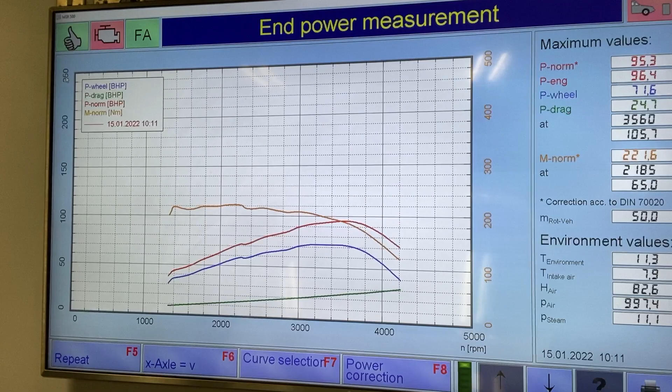So we'll have a look at the tuned graph now. I am very, very cold - I'm looking forward to getting home.

Bear with me, I'll overlay it over the standard graph as well.

These are a software down-tuned engine, so although it was 95 brake horsepower standard, we've made 156. Some people think that's too much, but these vehicles might make 165, 170, or they might make 150. It's irrelevant what numbers they make. What's important to me is that the engine is correctly tuned, whatever numbers it makes, and they all do differ.

So what I do at Pendle Performance is tune the engine, I tune the complete vehicle. If it's got huge, large wheels on, I'll tune the complete setup. I'm not tuning it for balls-out power, for bragging down the pub. The numbers are the numbers. I'm not interested if it makes 10 brake horse or 1,000 brake horse. As long as that engine's correctly, and more importantly, safely tuned, that is what I want to do.

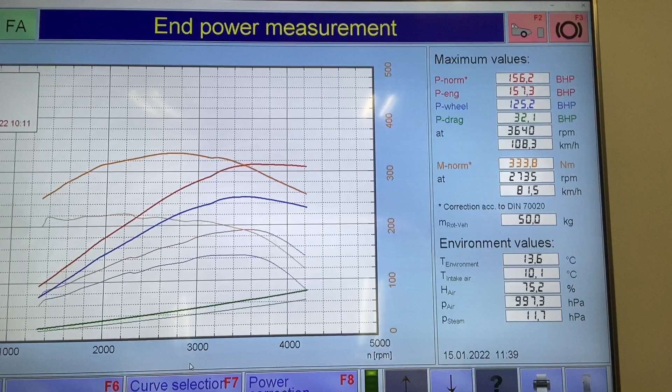So this is a look at the tuned result. We've made a very nice 156, and we've made a perfect 333 Newton meters of torque. Now these particular vehicles use a 5-speed gearbox, and we've talked about this many times. The fact is this 2 litre Euro 6 engine will make big torque at low RPM, way under 2,000 RPM.

A lot of tuning companies get mixed up. They tune the engine, yes, they tune it correctly, and they might make 360, 370 Newton meters of torque. The engine's perfectly fine at making that, they might make that at 2,000 RPM, but the drivetrain's not perfectly fine with that. It puts huge strain on the drivetrain.

So what you have to do with these is tune them for progressive torque delivery. There's an internal ECU torque limiter map, and the easiest way is to do it on that. You progressively tune that map, so you've got progressive torque delivery.

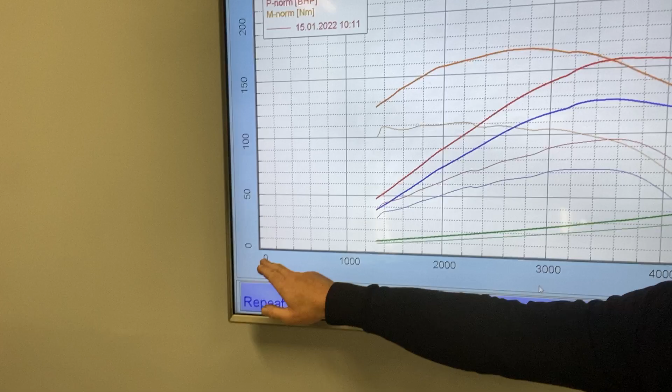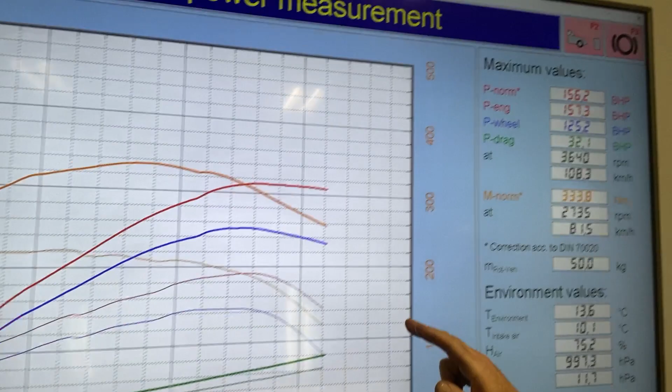And this is what you can see. So this is engine RPM, 0, 1,000, 2,000, 3,000, 4,000, 5,000, and then torque. You can see we've got progressive torque delivery, and we're actually making our peak torque, 333, at 2,700 RPM. This engine would safely make peak torque at 1,900 RPM.

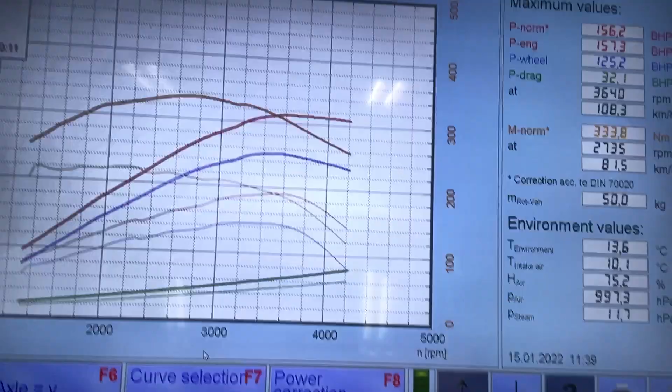It'd make 380 Newton meters of torque, but the drivetrain wouldn't make it. You'd end up damaging the drivetrain, the drive shafts, the gearbox, and everything else. So it's vitally important to make smooth, progressive torque delivery.

A lot of people ask why go to Pendle, or what makes Pendle different to other tuning companies, saying all remaps are the same. This couldn't be further from the truth. It really couldn't be further from the truth. Yes, there's a lot of good tuning companies in the UK, don't make no mistake of that. There's some absolutely awesome tuning companies. A lot of tuning companies have massively stepped up the game.

There's a lot more readily available equipment for us to live data log. A lot of companies have invested in dynos and stuff, but there is a hell of a lot of companies out there that are just flashing files. I'd probably say around 90% of companies in the UK haven't got a single clue what they're doing other than just flashing generic files into your vehicle.

You might go and get it done on your drive or wherever, and because it feels faster, you'll think this tuning company is absolutely excellent. But if we dig deeper, we'd know they haven't a clue what they're doing. They haven't a clue what they've done to your engine control, they don't know whether it's safe. They've just taken the cash from you.

You've gone away, and we see it time after time. Within a month or 2 months, these people are having major problems with the vehicles. We do retune a hell of a lot of vehicles here at Pendle headquarters, as do a lot of professional tuning companies in the UK.